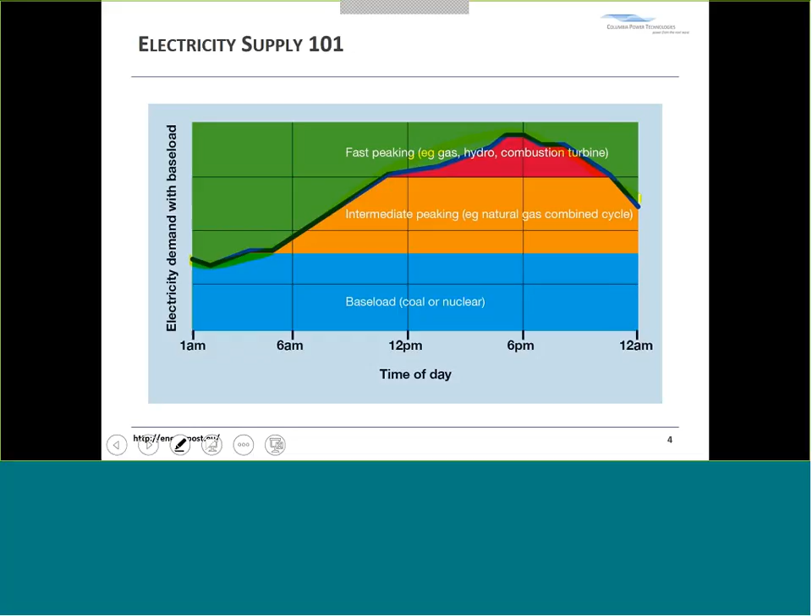And then for peaks, which is very expensive power, these types of resources are easy to turn on and off. You can crank them up in a couple minutes and get them running, and then they're quick to be turned off — they are dispatchable, as the utilities would say. It's the combination of these three layers that allows a utility to meet demand. As you'd expect, you have the least expensive power on a per kilowatt-hour basis at the bottom, and it gets more expensive as you go up.

Whether it's a region like Europe, which heavily believes in global warming, or whether it's more cost-based, as it is here in the U.S., driven by some public policy — again, the reasons vary with each region, but the trend is unmistakable.

The issue is that we're creating a problem for ourselves. Think about nuclear, coal, natural gas - whether or not carbon is good is above and beyond this discussion. But the issue is that we're replacing baseload resources, resources with high capacity utilization rates, sometimes called capacity factor. You have plants running at 90-95% of the year, and we're replacing those with intermittent resources that have lower capacity utilization rates.

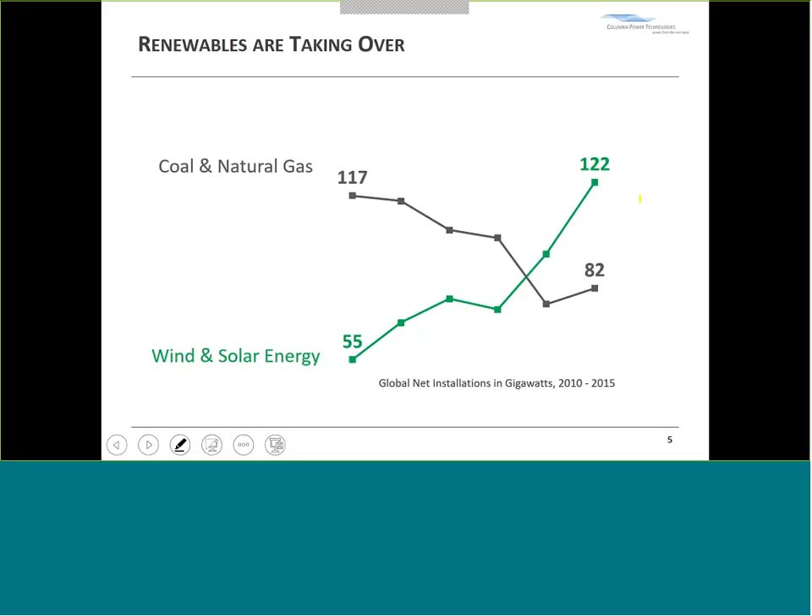So renewables, wind and solar, are great examples. Solar capacity factors vary depending on location, but it's usually below 20%. Wind, depending on location, can be 25, 30, 35%. Offshore wind can be higher than that. So what's going on, as we think about this graph, is we're switching out resources that effectively run all the time with resources that can't run all the time.

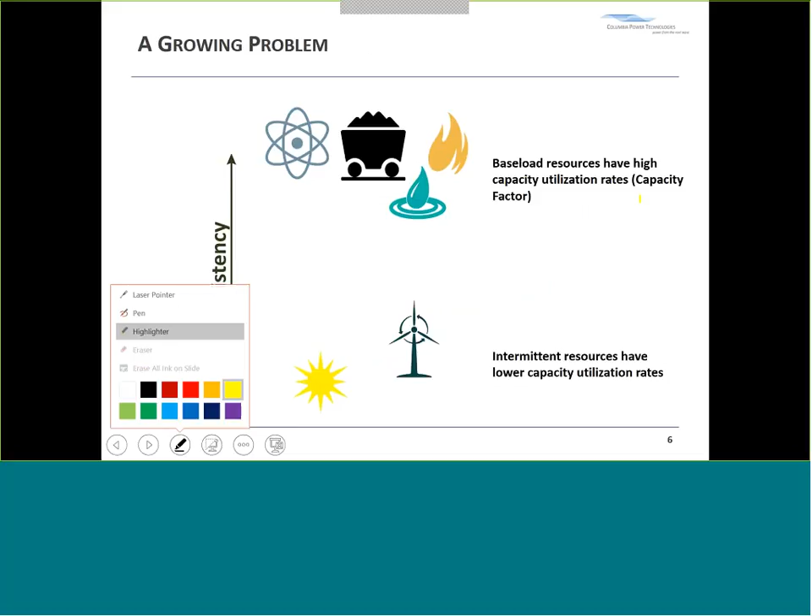Now, utility scale energy storage will help with that. It'll help flatten things out, help shift the supply to meet demand, if you think back to that peaking curve we looked at a few slides ago. But it's still not going to be enough, and this is where wave energy starts to fit into the picture. In spite of all the momentum wind and solar have, with billions of dollars of capacity added every year, there's still a spot, a hole that's starting to develop. We have to have renewables that can run more like baseload than intermittent resources.

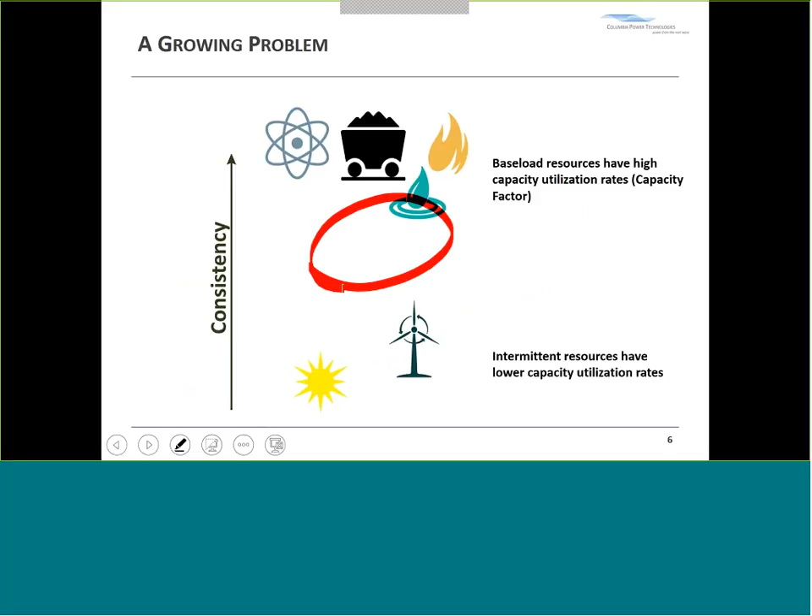So one great solution, the one we love best, is the ocean. The ocean is really just a big battery of stored wind and solar energy. I'll switch to our web page in a second to show a more real-time view of the wave regime worldwide. Because the ocean is a big battery, it can deliver energy more consistently. On average, on any beach, roughly 4 million waves come ashore every year. It's that night and day consistency that works in ocean energy's favor, specifically with respect to wave energy.

It's one of the things that, in spite of the difficulty of developing a utility scale wave energy technology, which we'll talk about in a second, is one of the great appeals. It's what drives everyone - the ability, the potential, to supply such a major part of our electricity demand. I'm going to try to switch here if I can.

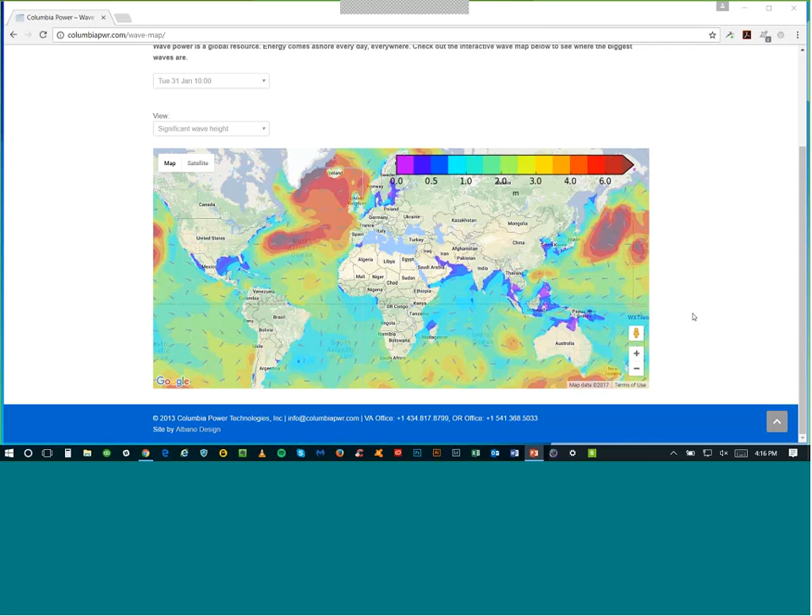Marine energy will help fill the gap. There are a lot of great attributes about wave energy. It is the largest untapped resource that we have. It's really close to the demand, as most of the population lives very close to the coast. It's energy dense, energy rich, and very consistent and dependable, which is what appeals to the utilities.

At the end of the day, or by 2050, there's a very significant amount of potential installed capacity. The Department of Energy here in the U.S. estimates that we could supply over 7% of demand with ocean energy. Worldwide, this can go up to 10%. So it can be a very material provider of electricity, provider of supply for the world.

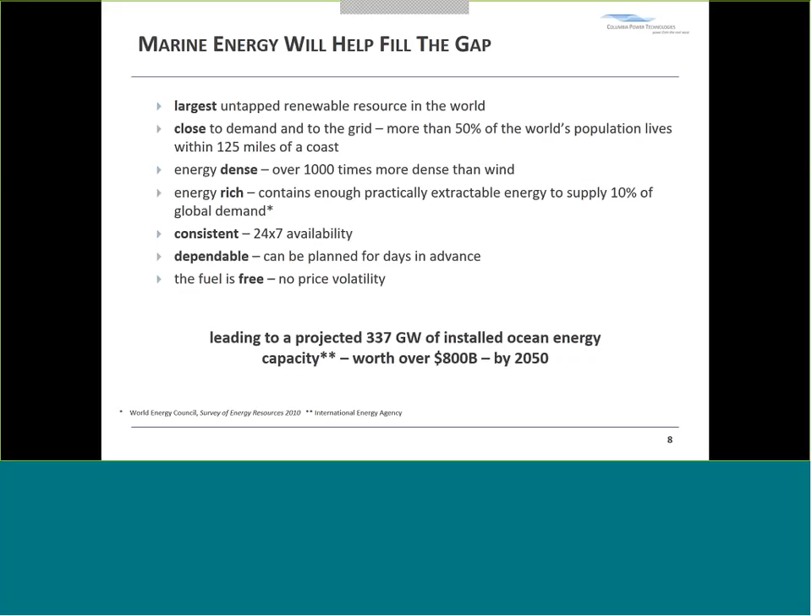So real quick, just a definition here. Marine hydrokinetics is the word we use mainly here in the U.S. to describe marine energy, ocean energy. Sometimes you'll see offshore wind included - in fact, Dr. Henkel yesterday included offshore wind in her definition of ocean energy. But there's a differentiation between hydrokinetic and hydrostatic.

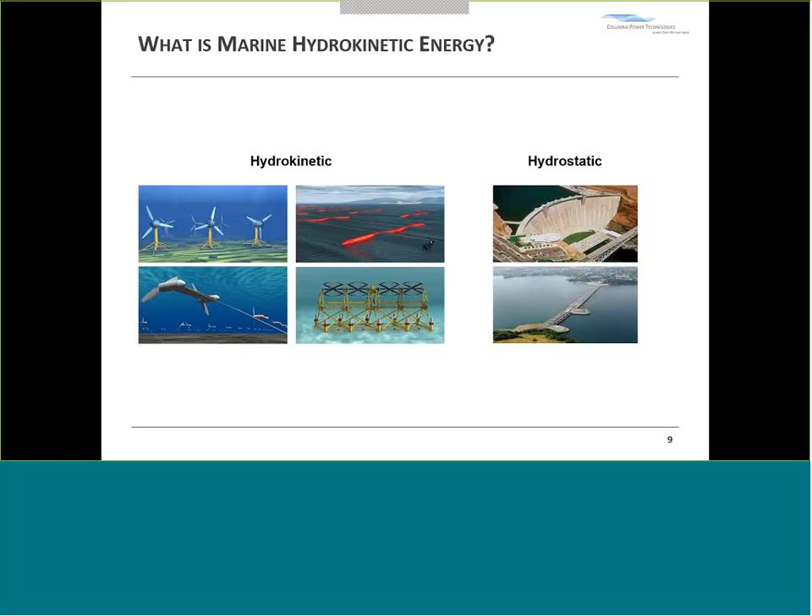The issue is, in spite of the appeal of supplying such a material amount of demand worldwide, the ocean is a really tough place to operate, especially if you've got to put a device that's supposed to stay in place for a 20-year service life and consistently and reliably produce electricity. I try to simplify and boil down the problem of commercializing or developing a commercial wave energy technology through what I call the trilemma.

The trilemma is three customer requirements, three market requirements that have to be balanced. You can't cheat on one in order to satisfy the other two. So just real quick, what I mean by each of these.

Acceptability is environmental acceptability. Can you get the project permitted from the regulators? Do the customers want to buy it? Will the local communities accept the placement of your devices offshore for the circumstance of our devices? I think you'll hear more about that in the next webinar given by SEARAY.

Affordability - we have to have a system. It may not start off affordable, but at the end of the day it has to meet the local cost requirements. Locally in Europe, energy is more expensive than it is in the U.S., which is one of the reasons why markets usually start there in Europe. But if you think about the U.S., Alaska and Hawaii have very different local costs of energy than, say, we do here on the East Coast where I'm located.

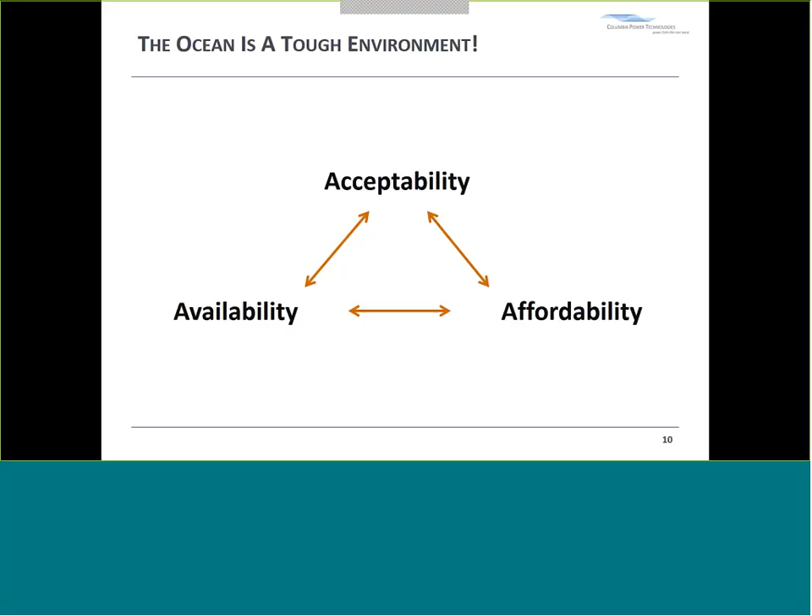Some of the important considerations here that we have to think about as we dive a little deeper than the trilemma: performance, efficiency, and cost. We have to capture the mechanical energy from every wave, and then convert that into electrical energy, so we're looking for the most efficient, cost-effective capture-conversion chain.

Some of our competitors have multiple conversion cycles. They'll capture the mechanical energy, store it in pressurized hydraulics, and then spin a turbine maybe onshore or on the device. We tend to do things a little differently. We have a single capture-conversion cycle because we think that's the most efficient way to go. But at the end of the day, it's all about cost.

Some of the impacts on device survivability we've talked about. Other things we need to think about are how easy something is to manufacture and deploy. Our systems are very large - 25 meters in each direction. When fully ballasted, they can weigh well over 1,000 tons. So you're really talking about dragging a ship around and deploying it in the ocean, or an array of ships. We have to think about how easy it is to deploy - can we just pull it with a tugboat, or do we need specialized equipment?

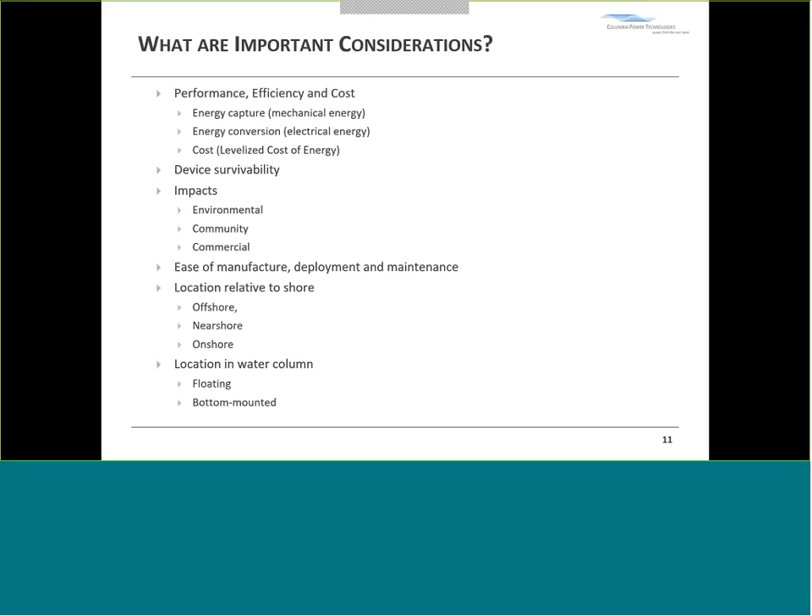So here are some of the device types - Dr. Hinkle may have talked about some of this yesterday, but just a quick review, and I'll talk about some pros and cons of each. These gifs are from Aquaret - if any of you are looking for resources, all of these, plus other great teaching resources and posters, are available at aquaret.com. It's a European-funded entity that's done a great job with some teaching tools.

So attenuators, in the upper left there - attenuators are really good at energy capture, very efficient, but they tend not to be very survivable. Imagine that joint in the middle of those two flaps moving up and down - that joint is a really tough area to make survivable when you think of a really large wave coming through. We need to design our systems for the 50 or 100-year storm, that once-every-century storm and the wave heights that come with it. So attenuators tend to be a little weak on survivability, even though they're really good on energy capture.

Moving across the top, oscillating wave surge converters - these are flaps, sort of like a book cover, that get pushed with the waves. These tend to be near shore, almost in the surf zone, usually in 15 to 20 meters of water.

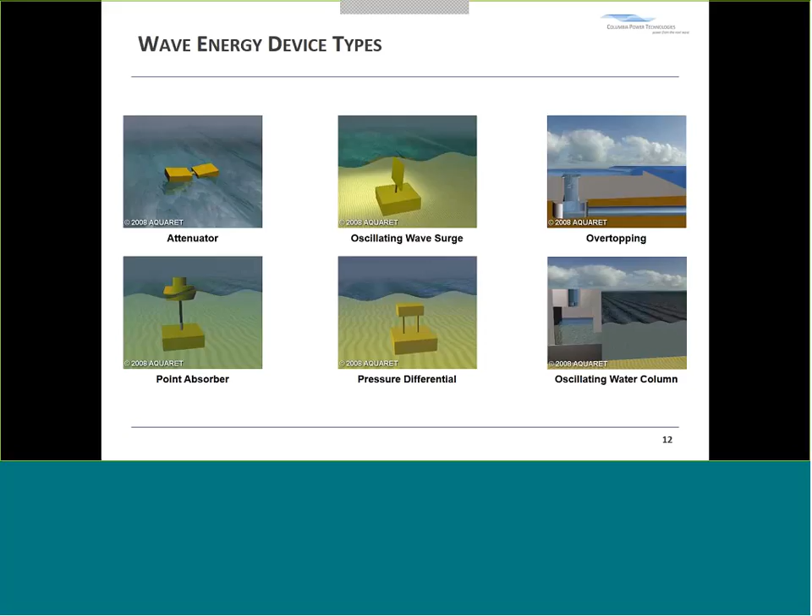So just some specific examples. I've shown graphics here rather than pictures, just so you can get a fuller view of what the devices look like. And again, I think Dr. Hinkle may have done a similar situation.

So attenuator, long, almost like sausage link type systems. So really good at energy capture, but again with some survivability issues. That's actually a picture of a Scottish company. You'll see that this is worldwide here.

Oscillating surge. This is a picture of a Finnish company's oscillating wave surge device, AW Energy. Overtopping, that system's called the Wave Dragon.

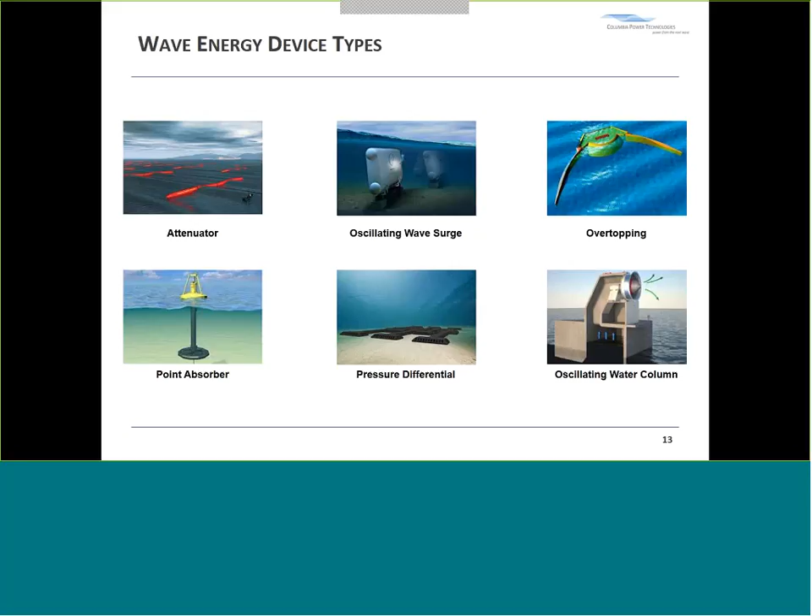A linear point absorber here, that's a floating system. It may not quite look like it in that graphic, but that floats and moves up and down in a linear fashion. Pressure differential M3, which is another Oregon company. You see one of the renditions of their device, and then an Australian company with oscillating water column. And you can see the large fan there.

So each of our competitors really has chosen a variety of potential development paths. The early generation of technology developers, specifically Pelamis, that attenuator developer, and the oscillating water column developer that you saw on the previous screen, they made a choice to focus on device scale first.

So I want to try to get a really large piece of equipment in the water as quickly as possible. And once I figure out how to make a device that is survivable, then I'll worry about making something that's economic at the end of the day.

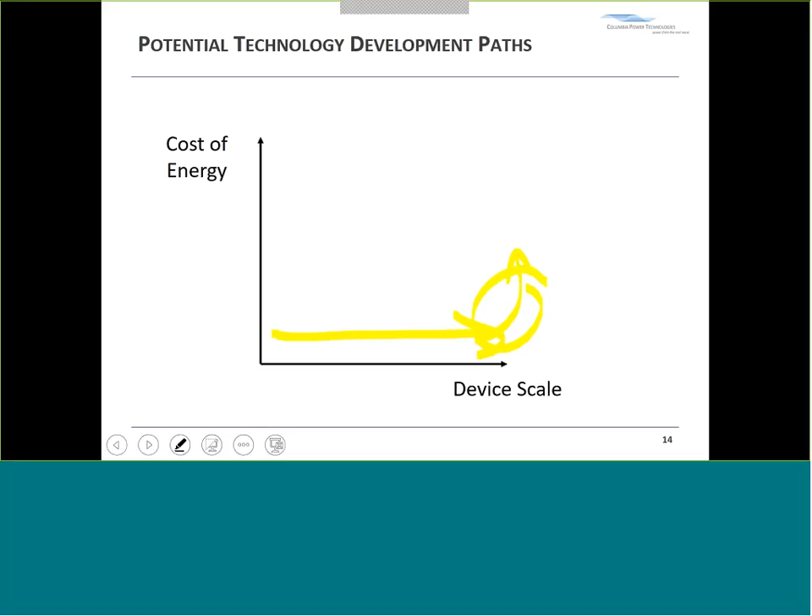Part of the issue of focusing on device scale first, doing some really large deployments, is it's a really expensive way to innovate. And the problem is that you tend to literally and figuratively design yourself into a corner here. There hasn't been a lot of success in going out along the x-axis and then trying to turn north, to turn up, to make a practical device into an economic and practical device.

Many of you may be familiar with the Wave Energy Prize, which is a competition that the DOE just ran. And there was an Oregon company that was very successful there. So again, some more Oregon roots. They won the Wave Energy Prize, which is similar to the X Prize on the rocket side.

But the Wave Energy Prize was meant to come up with an alternative development path. And that alternative development path says there is a less expensive way to potentially figure your way through the commercialization of a device. And so the Wave Energy Prize says we're going to try to head up and make a really economical device. What are the most efficient devices from an energy capture standpoint?

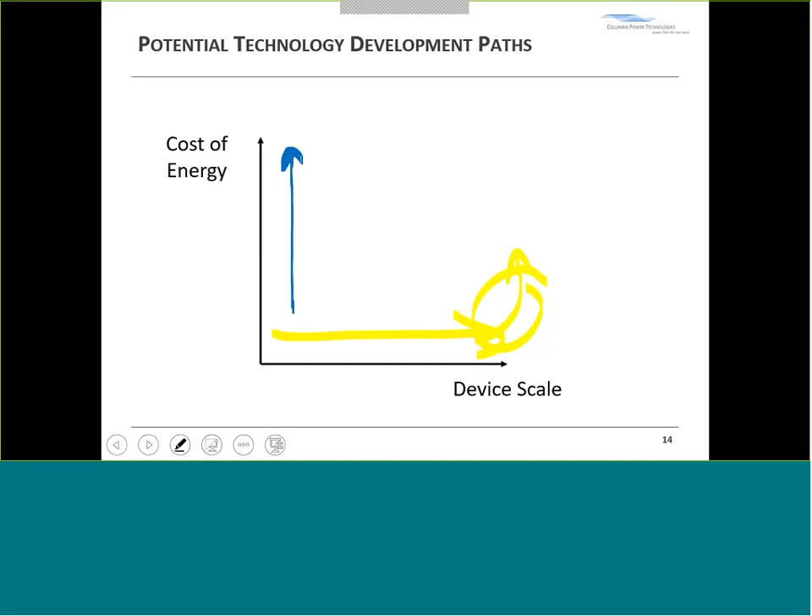And once we figure out what's best from an energy capture standpoint, we will build up scale and try to make it most productive. Because again, this is the goal: a practical, economic device. From a potential customer's point of view, this is a device that not only the manufacturer can make, but that I want to buy. Thinking back to the trilemma, it's an affordable, acceptable, available device.

At Columbia, we've taken a little bit of a different path. We've tried to be a little more holistic in our view, taking into account really both sides of the equation.

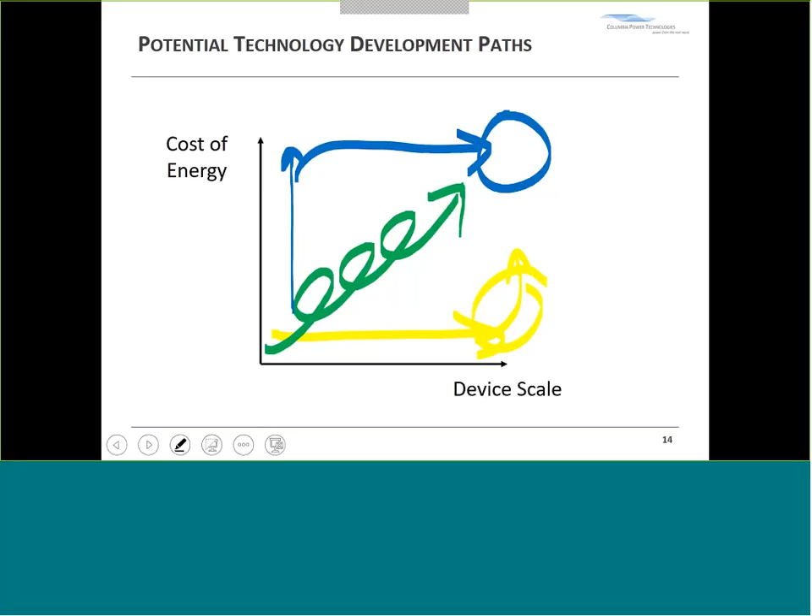So we've developed more in this flat spiral approach. We put a larger device in the water, learn about that device, learn how to make it more economic. Maybe we have to back up and go to smaller scale as we fix some of those fatal flaws in the technology. This path takes a bit longer, but we think it ends up being the most cost efficient and time efficient at the end of the day, getting you to the upper right quadrant as quickly and efficiently as possible.

So this is our solution. We call it the STINGRAY. Within the STINGRAY, you have two floats, a forward float and an aft float. Those two floats move independently of each other, and they move independently of the nacelle that you see here. The nacelle is that central cylinder.

The nacelle contains two direct drive permanent magnet generators. This is the same type of generator you'd see in an offshore wind turbine. It's actually the type of technology that dominates—really 85% of offshore wind installations in Europe use direct drive permanent magnet generators. We can talk more about that if anyone has a question. Each of these floats turns its own generator inside the nacelle.

So the waves for us would be coming in this direction. Again, this is a very large device, almost 25 meters in every direction, well over 1,000 tons when fully ballasted. I'll show you some additional pictures in just a second. But as each float moves up and down, it oscillates the generator it drives backwards and forwards. So we don't spin in a continuous direction like an offshore wind turbine would spin clockwise—our generator oscillates back and forth.

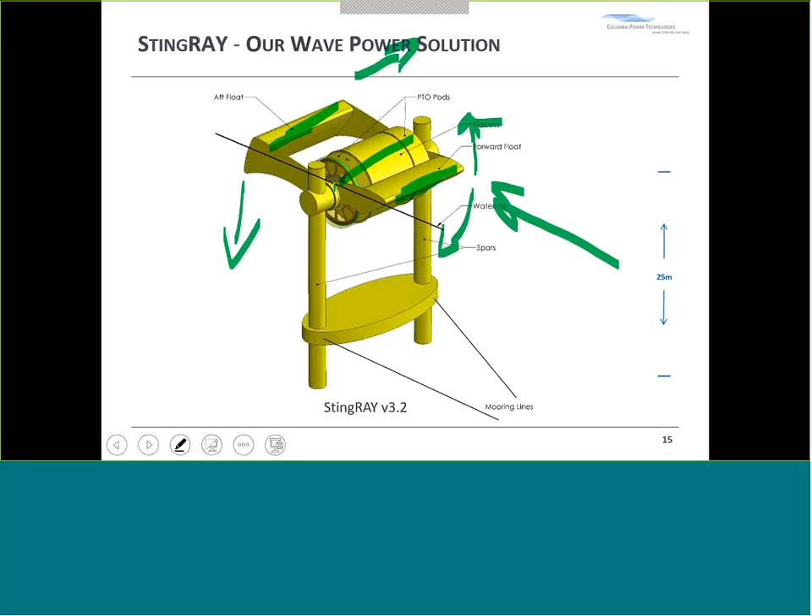But the main body, the nacelle and these spars—this square here—that's also moving in the water. So as it moves, it's really the relative motion between the nacelle and each of the individual floats that makes electricity. We're trying to accentuate the relative movement between each of those bodies as much as possible. The more relative movement we create, the more electricity we generate.

So this is a simplified example of a STINGRAY deployment in the water. We have a very simple mooring system—if you were going to moor a boat over the winter, you'd have a bow line and a stern line, no different for us. A project would be an array of these devices, so you'd see maybe 10 per square mile in the ocean, all set up in a matrix, each interconnected. The electricity flows out of the device into this collection point and then moves ashore to the grid interconnect.

The power we produce has to be conditioned. For the early systems, we're producing DC power that gets conditioned to grid-compatible AC power, so you have AC flowing out of each device for the grid interconnect. As arrays get larger, you'll see DC gets shipped ashore, and the conditioning happens onshore for the grid interconnect. This allows for a more cost-effective installation because we don't have to put the conditioning equipment, the electric plant, on each of the devices.

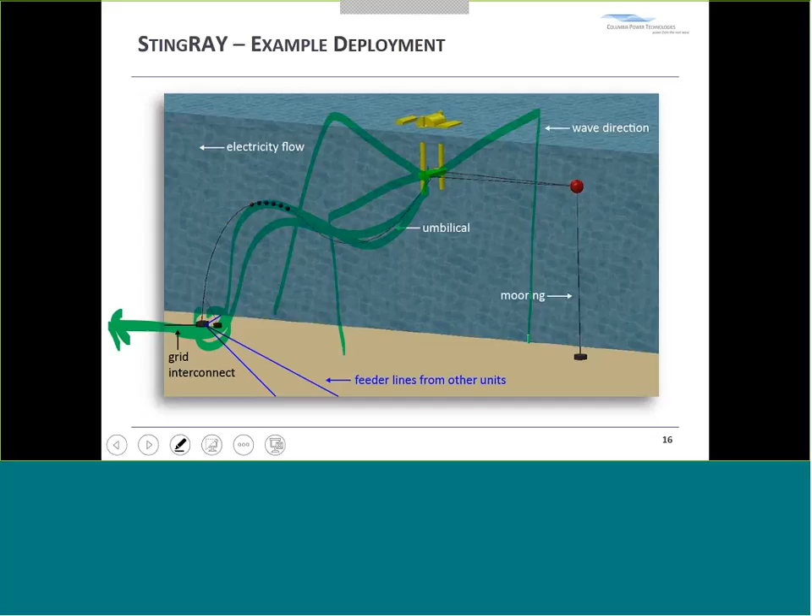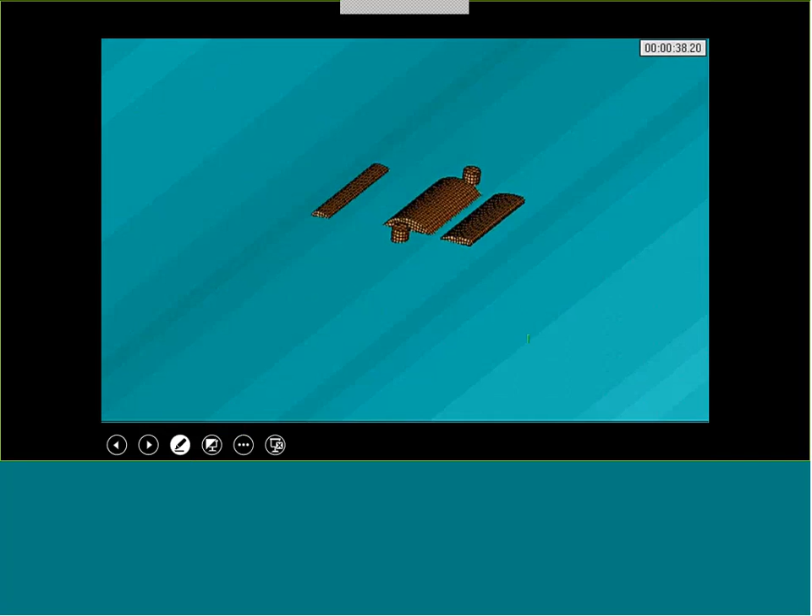So here's a quick animation of our latest version, the STINGRAY version 3.2. For those interested, this modeling was done in ANSYS AQWA software. We'll go subsurface here in just a second. You can see each of the floats move independently of the nacelle. The nacelle is also moving—again, we're just trying to accentuate the relative movement between each.

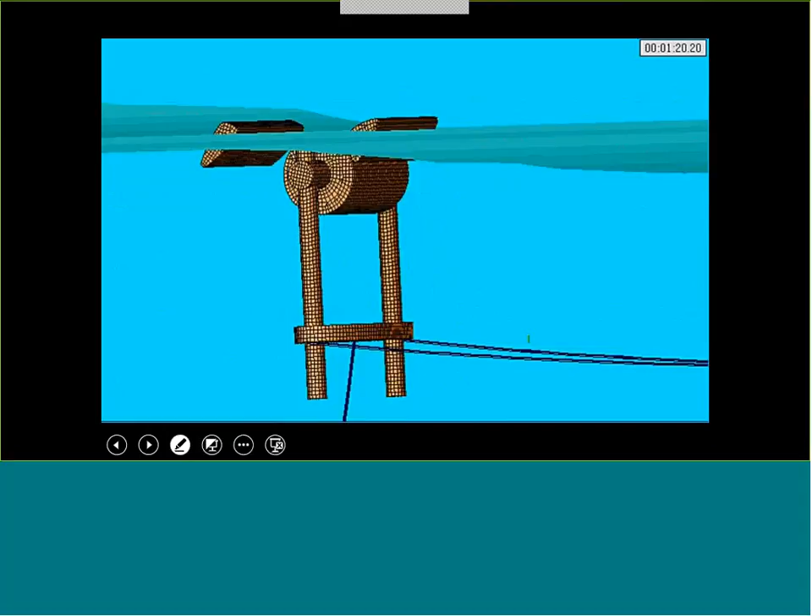You can see the mooring line coming out of the right side, with waves coming from your right to left. And then the umbilical, which carries the electricity from the device, is that line hanging down. Our system likes to stay aligned in the predominant wave direction.

It's one of the reasons why we don't need all those additional mooring lines. It's one of the lessons we learned with one of our deployments in Puget Sound: if you have 3 lines connecting the device, only one of the lines is holding all the load at any one time. So you might as well make that one line handle all of the load and have redundancy built in, rather than putting extra gear in the water, with cost and environmental impact factoring in.

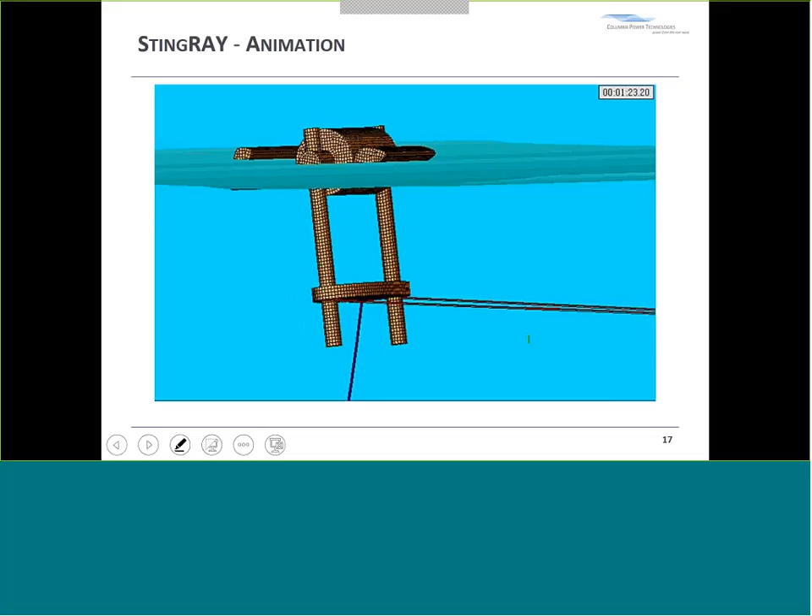So how did we get to the STINGRAY? Just a real quick history and some of the evolution of our design. This system here, a linear point absorber, was what we originally licensed from Oregon State. It was actually an undergraduate project of one of our engineers. We took that design and did a sea trial with the L1 design.

The L10 was an enhancement of that system. In the L10, if that's the water line, the device moves up and down through that float. This was a composite fiberglass hull structure, again using a permanent magnet generator. We came to the conclusion after testing this device that we needed something more cost effective that captured more energy.

This is where we made the leap from a point absorber to a hybrid device, the combination point absorber and attenuator. One issue with the linear point absorber is wasted capital investment, because really only 1/3 of your generator is active at any one time. If you think of a linear generator, that's the rotor, the magnet, and you have copper coils wound around it. As the rotor goes up and down, 2/3 of it is never covered by a copper coil, so you're not generating electricity.

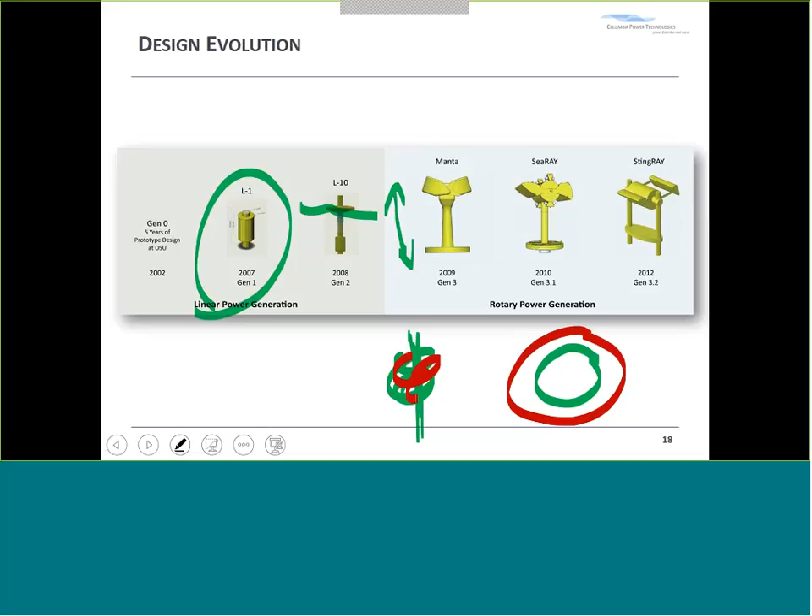With the MANTARAY, there were 2 wings, and I'll show some clips of tests we did with each of these devices in just a second. The MANTARAY moved to a 2-wing design with 2 symmetrical floats and a very small nacelle. One thing we learned testing the MANTARAY was that if we made the nacelle larger, we captured more energy. So moving from the MANTA to the SEARAY, the nacelle is a larger cylinder, a bigger part of the overall device, and we capture more energy that way.

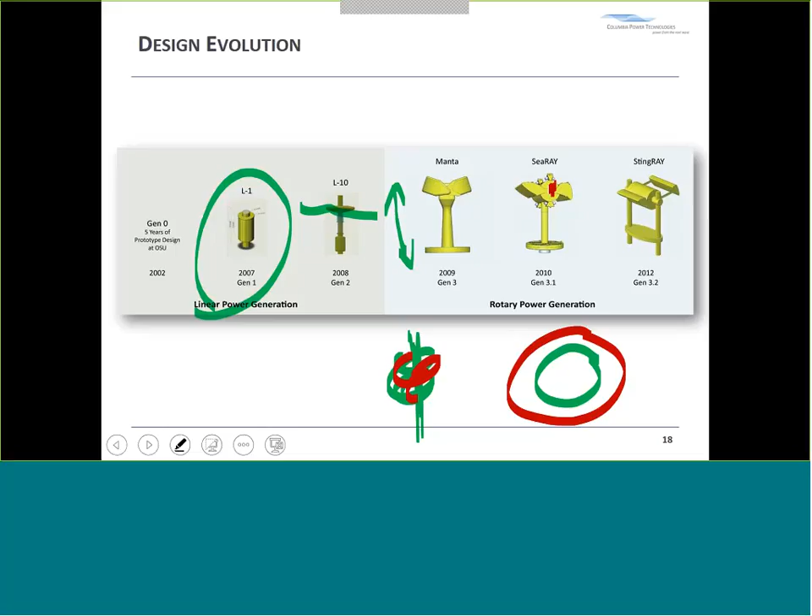One thing we learned with the SEARAY is that the floats had end stops meant to keep the floats from banging into each other. It worked great, except we were banging those end stops too hard. As we tried to scale the device up to a utility scale system, the engineering and capital investment around keeping those floats from banging into each other was going to be way too expensive. We were going to start to violate the affordability side of the trilemma. We make an investment in engineering and capital costs of the structure, but that's too much and the device becomes too expensive.

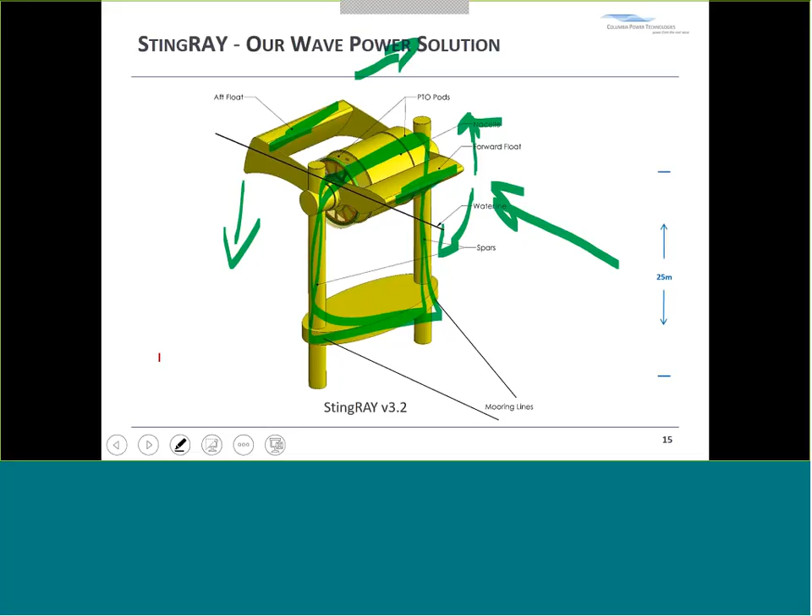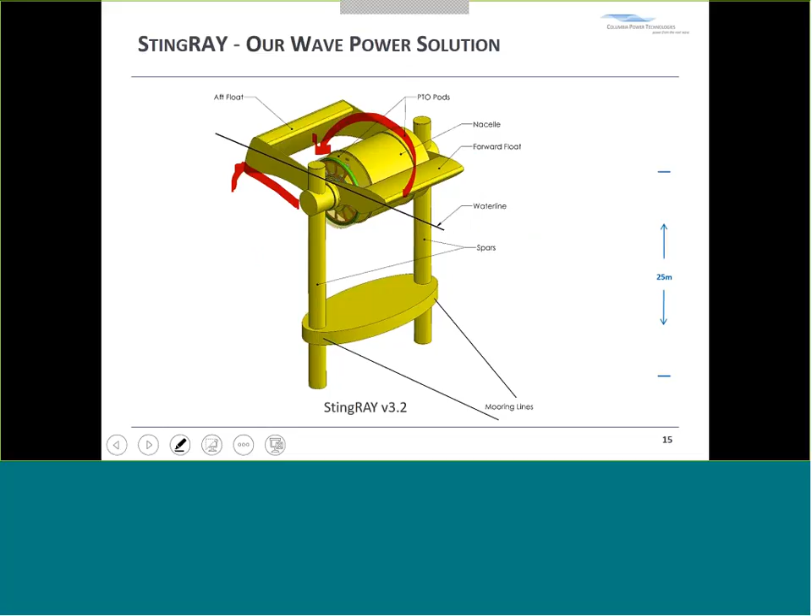Another big aha, which seems obvious now, was shifting the aft float back in the STINGRAY design. Let me show you this. We shifted the aft float back, so now in really heavy seas, the forward float just rolls over and nests inside of the aft float. The device is still working, still making electricity. It's not as efficient as it would be with the float in its nominal forward-facing position, but the device passively protects itself. It's a very survivable design, and we actually found that power production went up when we made this change. This is an example of trying to create something more available, more cost-effective, and more affordable at the end of the day.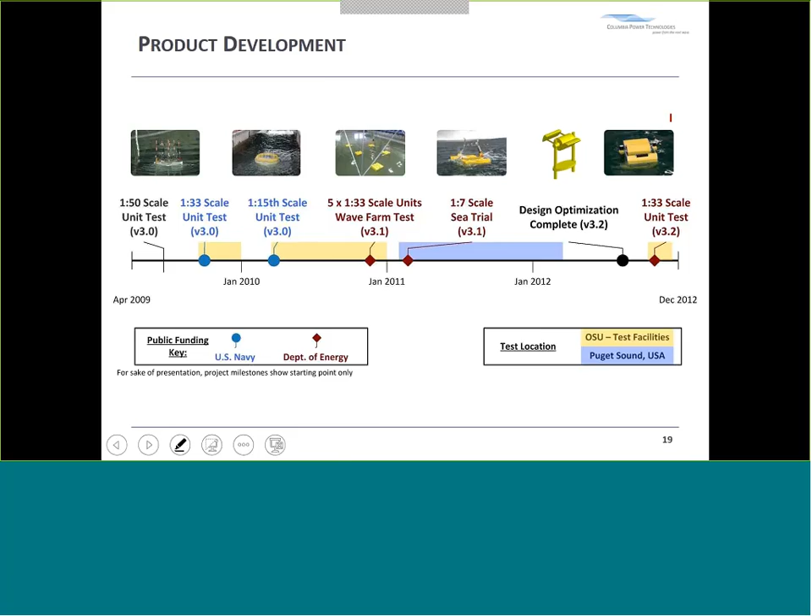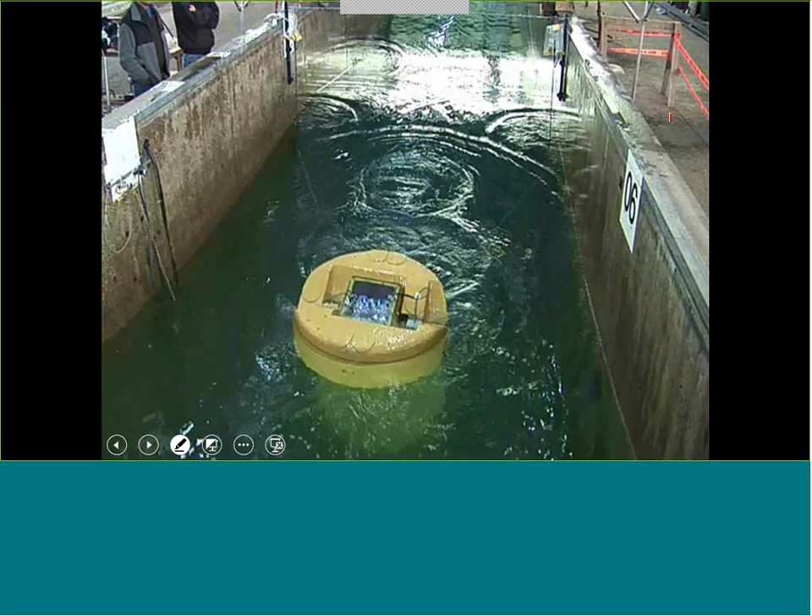So this is the MANTARAY in the wave flume at Oregon State. You can see the two floats moving independently of each other in this clip. These are some really large relative waves. At scale, that's a 1/15th scale unit. Those waves were probably 70 to 80 feet at full scale. This was part of our effort to make sure we have a survivable system as we design towards the 50, 100-year storm.

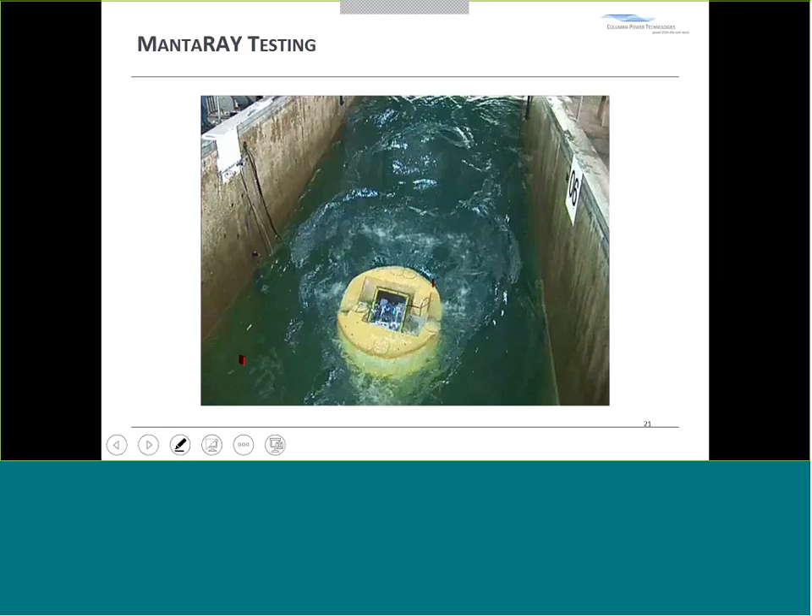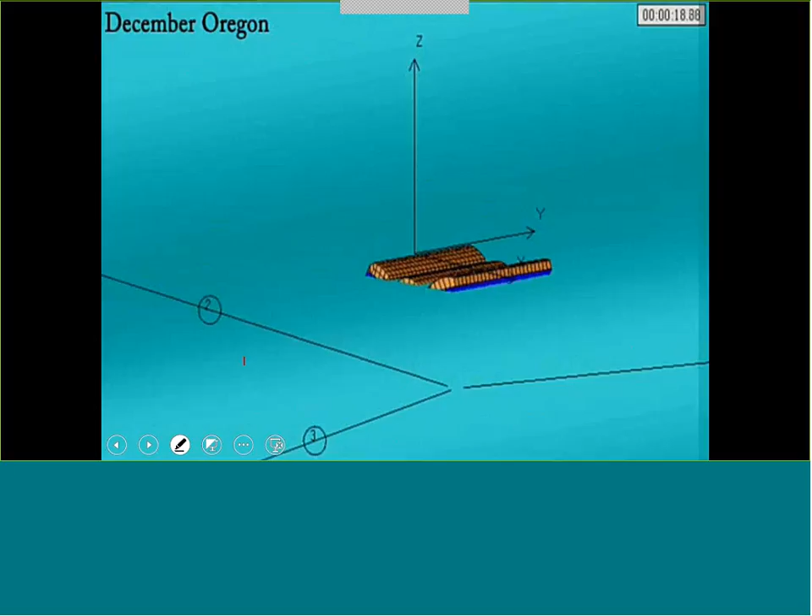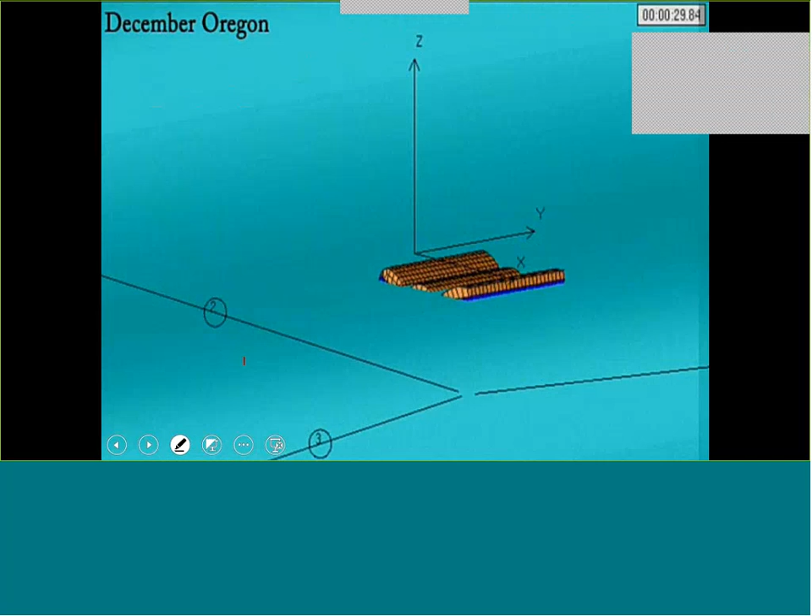As we made the move towards the SEARAY, this is one of the early modeling efforts we made with it. This is again in AQWA. This is a December storm off the Oregon coast that we're emulating here. Again, you can see the two floats moving independently of each other, and the nacelle, which is significantly larger here in this shape than what we had before.

This is the Puget Sound test that we did. For those of you familiar with the Seattle area, that's Discovery Park in the background. This unit was in the water for 13 months. It was a great test for us, and we learned a tremendous amount. You can see the end stops there, the red rubber pieces, and in a really violent storm the collisions were very significant, really too significant, which is why we ended up moving the aft float back.

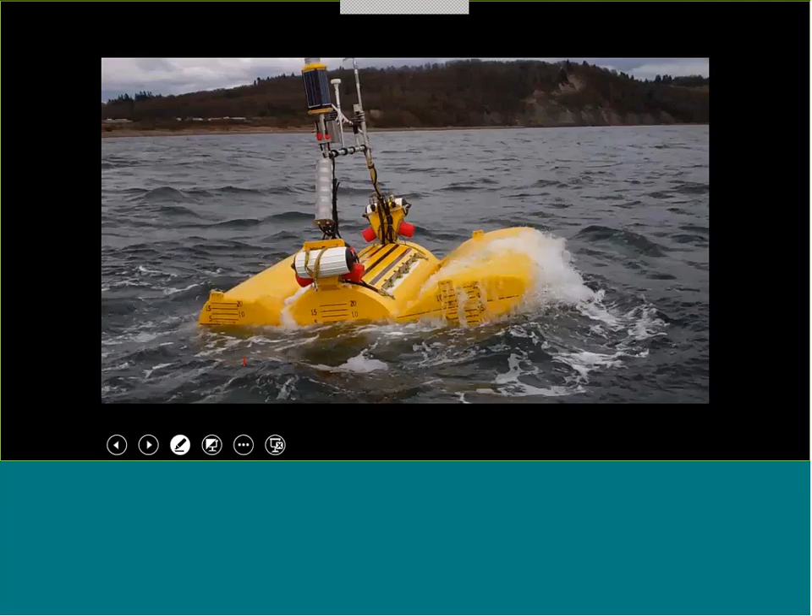Here in Puget Sound, even though you would consider this to be a relatively calm place, during winter storms we saw 10-foot waves. This is a 1/7 scale device, so at full scale we were seeing 70-foot waves at this spot. We picked this spot because with the shape of Puget Sound and the storms during winter, you have a long open fetch of water stretching down towards Tacoma. The storms tend to come straight up the sound, and over that 20-mile fetch, with the storms you get there locally, it was able to generate some very large local waves.

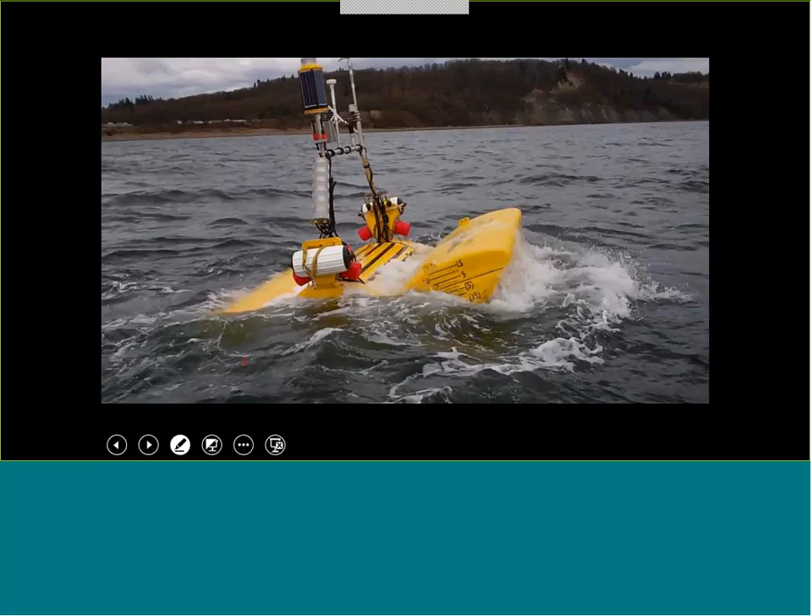So this was a great test for us, it proved the survivability of the design, but also made us understand that we needed to continue to work on the economics of the device.

This is a perfect example of having to back up and rescale. When we moved the aft float back, we needed to really back up, going from a 1/7 scale device to a 1/33rd scale device. So the SEARAY here was 7th scale, this is 33rd.

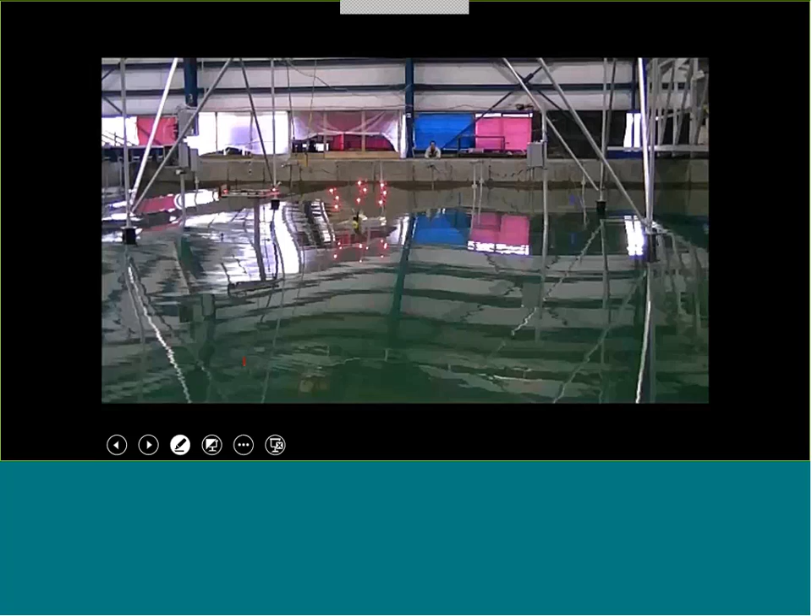This is back at Oregon State in the tsunami wave basin, where we had done significant testing otherwise. We're doing motion tracking on the device, and you can see the LED balls there as we're capturing that. These tests for us span over a 3-week basis usually. Again, it's one of the great things of being in Corvallis: our engineers get to go home at night, and we can still do 3 weeks of very intensive testing.

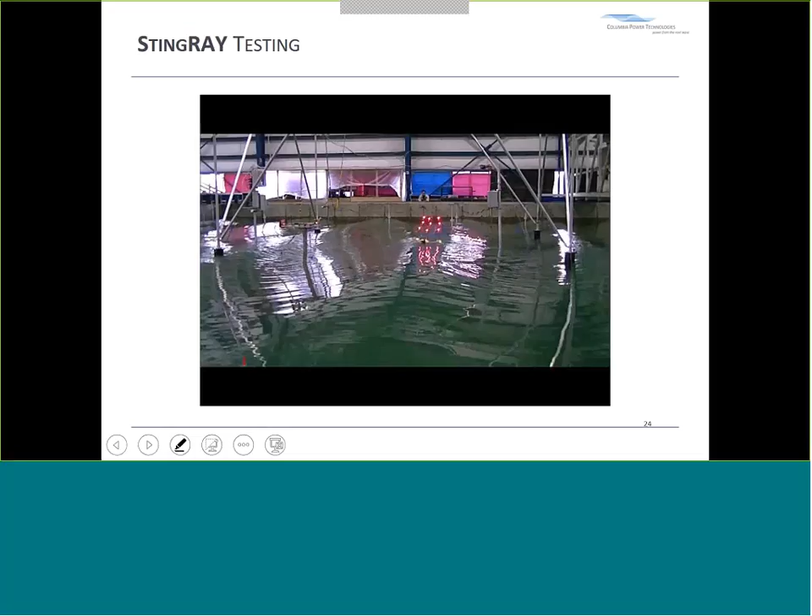One of the tests we are involved in now is a DOE-sponsored test at the National Wind Technology Center. Our generator and internals are very similar to what you'd see in a wind turbine. One of the facilities they have, located in Boulder, Colorado, is this 5-megawatt dynamometer. Normally you would see a wind turbine nacelle hooked onto the dynamometer. The dynamometer is this piece of equipment here.

We're able to exert non-torque loads on the device. But this dynamometer is also smart enough that we can feed real seas data into it, so it will oscillate the generator back and forth.

This generator here that you see is really just half of the equipment. This is the rotor. The magnets for the rotor will fit along these tracks. What you don't see here is the outer housing, which will fit over the entire circumference of the device. This is the largest direct drive permanent magnet generator that we know of on record.

That's part of what we're testing here: the mechanical design. A very large manufacturer, whose name you would all recognize, provided both the power electronics and the active materials for the generator. This is a little over a 6.5 meter diameter generator. Over that entire circumference, we are maintaining a 4 millimeter air gap between the rotors and the stators. Again, that design is proprietary to us, but it's that mechanical design that is novel to the world, and is what we are validating in this test.

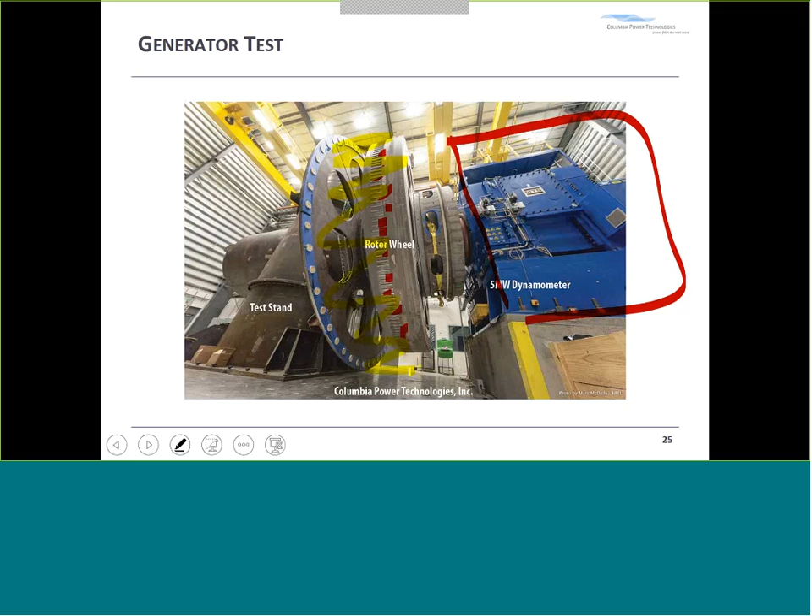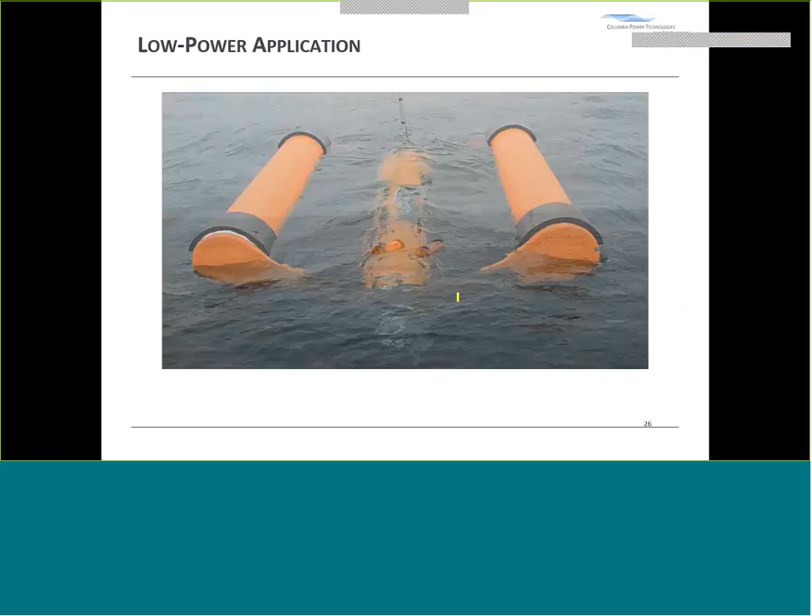One last thing I wanted to show is a low power system. I'm going to stop this and then restart it.

Our main focus is the utility scale market, selling our equipment to utilities and developing large scale wave energy projects. A byproduct of that research is low power systems. The DNA of this system comes from our two-float design, but this low-power application was designed for DARPA. It's meant to run a low-power device, think watts rather than megawatts, to run a deep-sea sensor.

It is meant to be independent, not grid-connected. You could use these devices for harbor security, for oceanographic research, or for defense purposes, monitoring what's going on in the deeper ocean where it's not cost effective otherwise. The appeal of a wave energy device is that you break the cycle of recovering devices, replacing the batteries, and redeploying. Our system is meant to keep the battery topped off, hopefully allowing greater mission persistence and a lower overall cost of ownership.

I'm going to turn on the sound here and start this over.

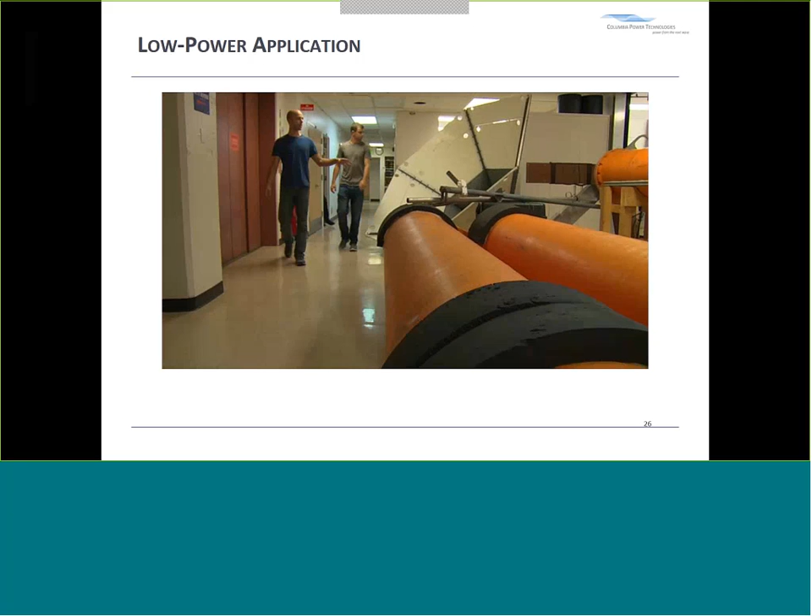A new source of power at sea. Capturing the energy of ocean waves and using that energy to generate electricity. The whole idea here is to take a completely different approach to generating energy in the ocean, an idea that evolved quickly at the University of Washington's Applied Physics Laboratory, in collaboration with Columbia Power Technologies and the Monterey Bay Aquarium Research Institute.

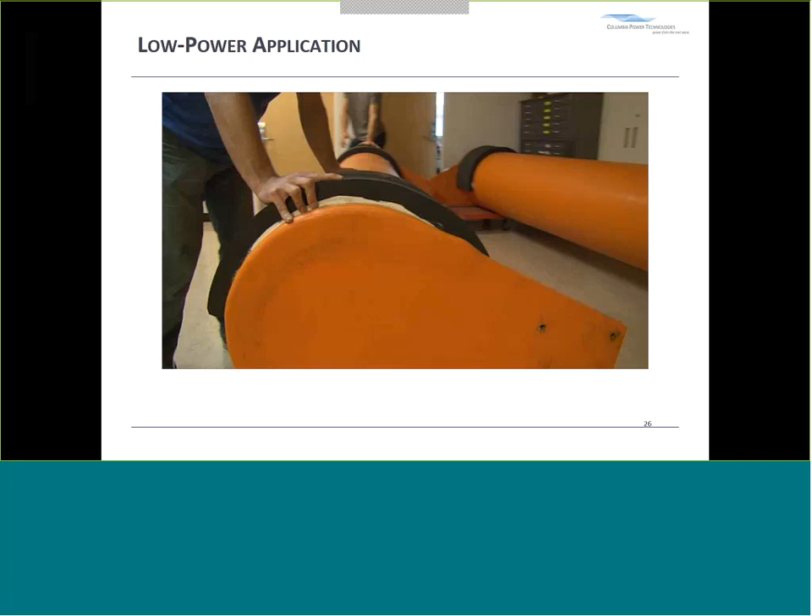Just a year ago, we had a concept, some sketches on the whiteboard. We didn't know quite what this thing was going to look like. This thing is called WEBS, the Wave Energy Buoy that self-deploys. It serves as a source of electrical power at sea. As opposed to typical wave energy conversion devices, which are anchored to the seafloor and generate large amounts of power for sustaining onshore needs, this is all about having energy available in an offshore environment. There's no anchor, it's a free drifting system.

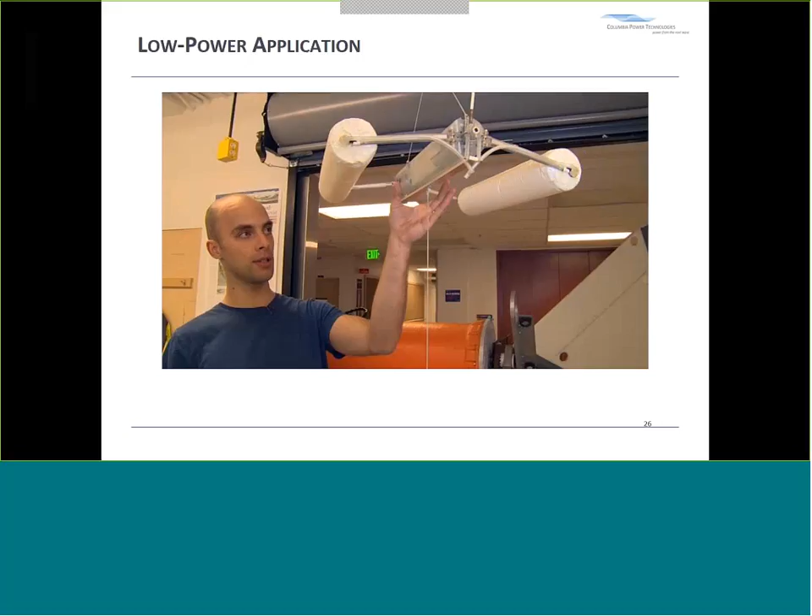This device here is a one-seventh scale model of WEBS. We have the surface expression up top with two floats, and the nacelle that has the power generating equipment inside it, connected by a tether down to a heave plate about 60 meters down the water column.

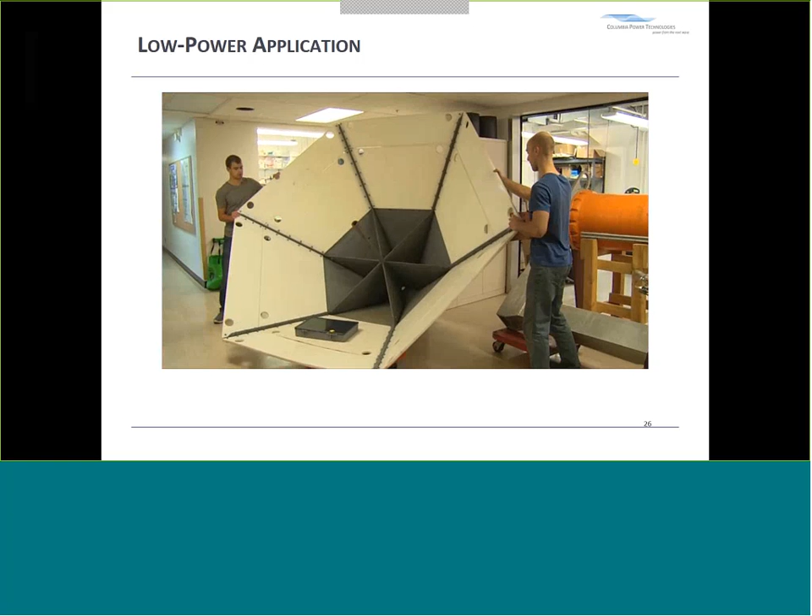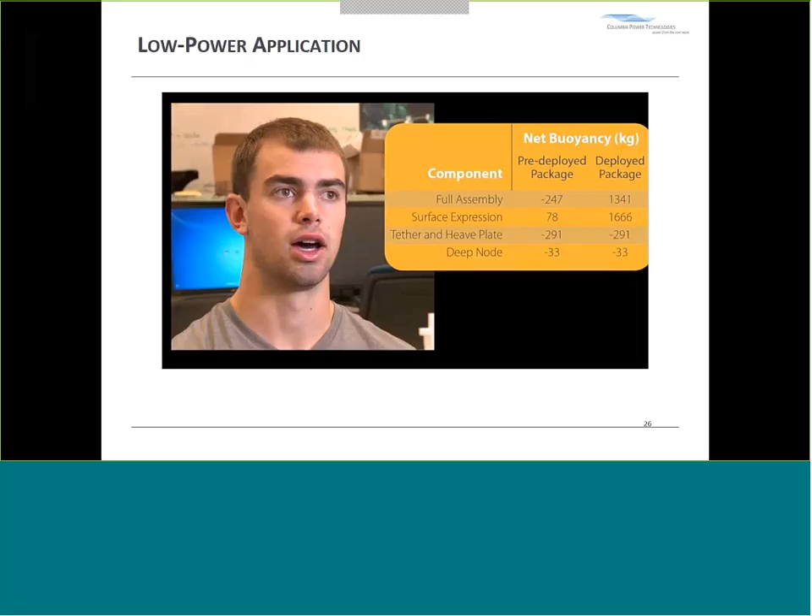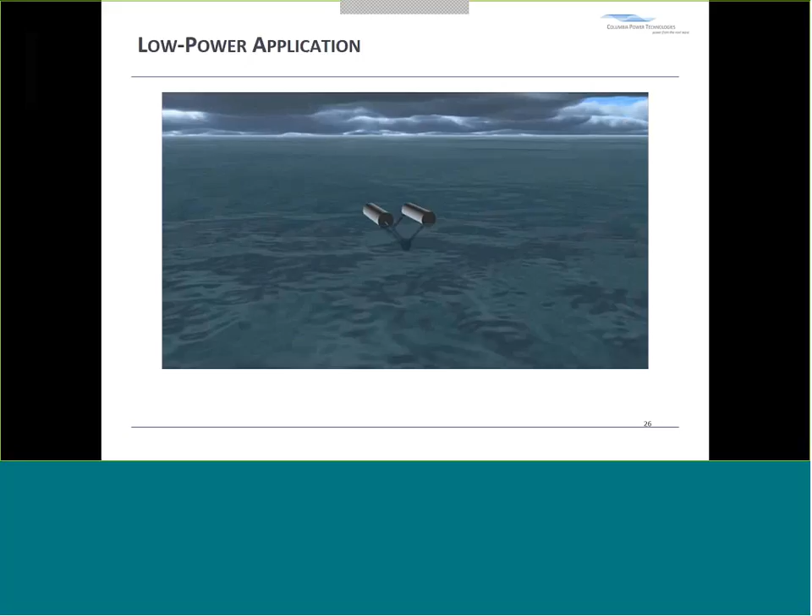University of Washington mechanical engineering student Curtis Rusch came aboard the WEBS project early to develop a model. Paul sent along his drawings of a SolidWorks model of what the whole device would look like, and preliminary specs for the spring forces, lengths, weights, and buoyancy. I was able to take all that and put it into the model and start running it at various wave conditions just to see if we were capturing a motion that looked reasonable.

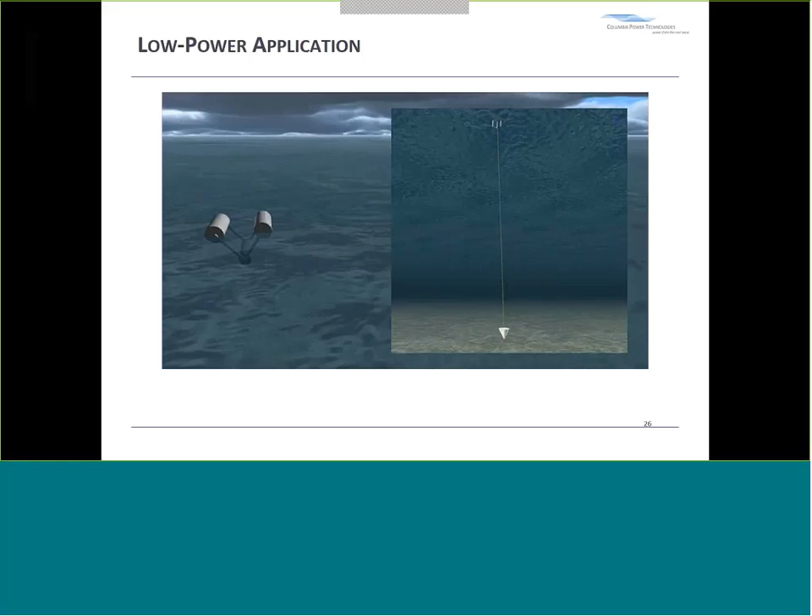So with that, Melissa, I'm done, and I hope everyone found that informative, and I'd love to take any questions people have.

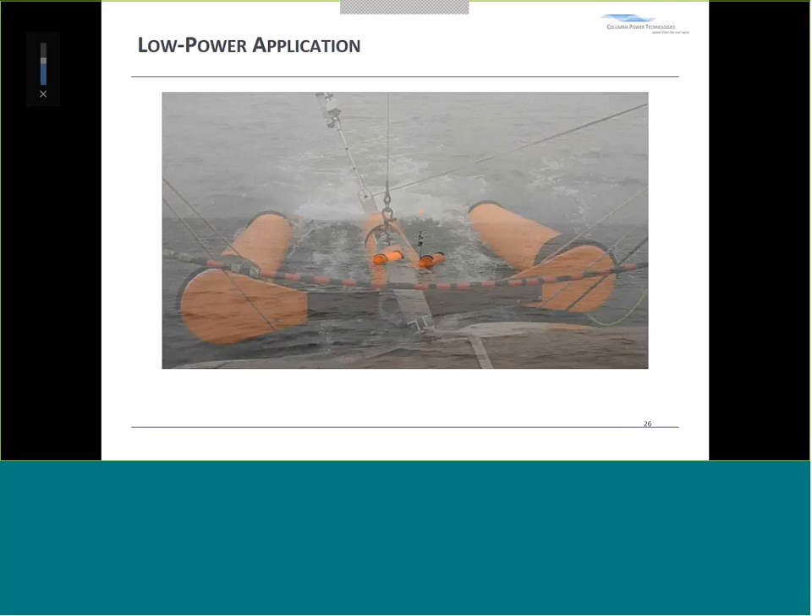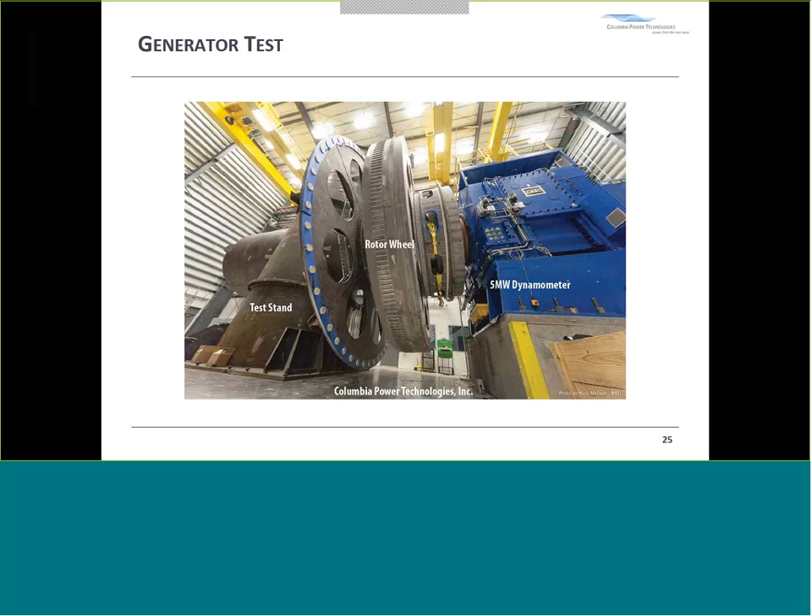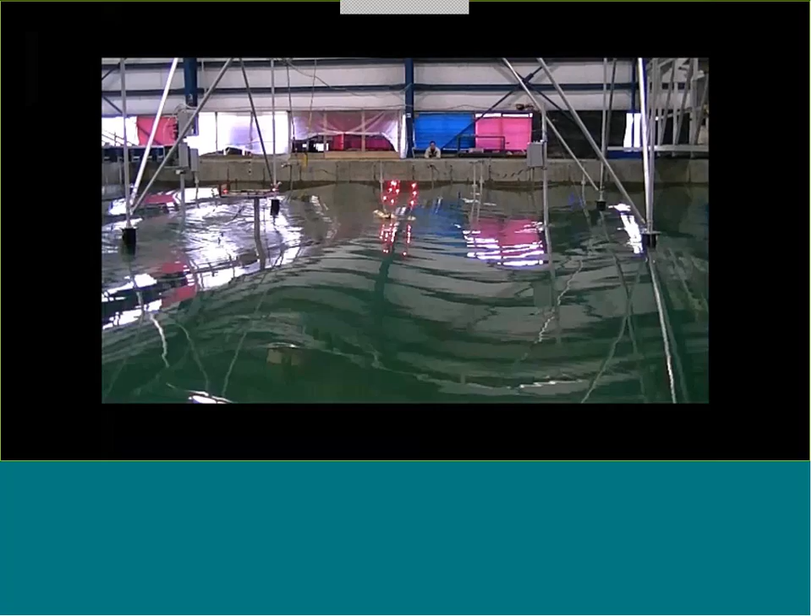Sure, I'll work my way backwards through the presentation and give you some idea of the cost of these tests overall. This test was approximately, this was somewhat over $1 million for all the development, manufacturing, and build of this low power system. This generator test will end up being over a $5 million project, jointly sponsored by ourselves and the federal partner. This test was significantly less expensive, one of the great things about being in the tank, approximately a $300,000 test. This one was almost exactly a $2 million project all in. This was a $750,000 project, I believe. So yes, you can see there are some very significant costs associated with testing these systems.

Okay, someone had a question, probably about the pieces of equipment you're specifically working with. Are there any significant concerns regarding harm to marine mammals or other sea life?

Yes, it's one of the things we really have to focus on. I mentioned mammal migration—if you think about it from a whale's perspective, a wave energy project, an array of devices with all those mooring lines, can really look like a fence in the water if you have too much gear. So one thing incumbent upon us is coming up with ways to avoid creating that appearance of a fence. One question Sarah and her colleagues have to help us answer is whether we want to divert mammals from migrating through the project, or create avenues for them to come through. We also need to think about the effects of putting anchors on the bottom—are we creating habitat where it didn't exist before? We have to watch out and not build in marine preserves, but we can also help build habitats. We build habitats all the time by sinking vessels and putting other structures on the seafloor. Our systems can provide initial habitat, or help spark habitat formation.